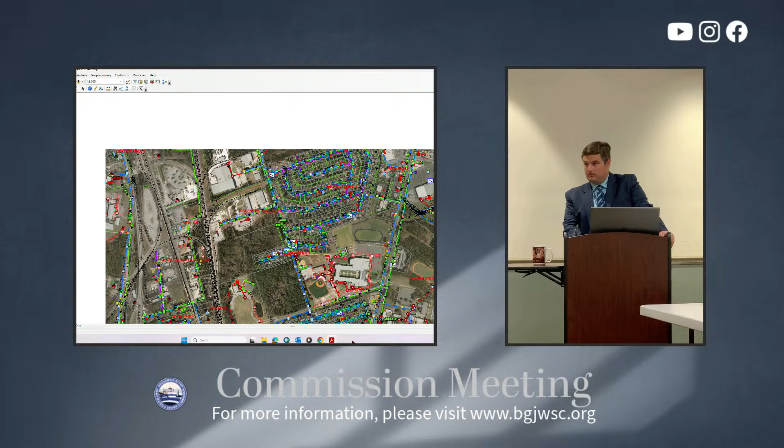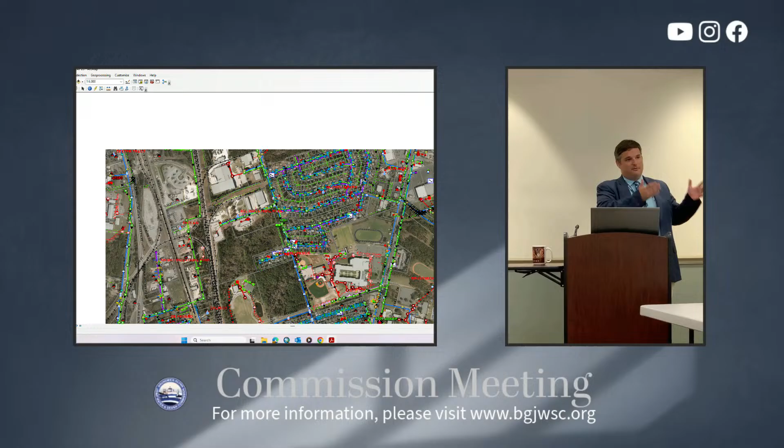The property corner is. Does the property adjoin it, where the sewer line is? Well, I think it's right-of-way, but yes, sir. I don't understand yet. Is the sewer on the property? There's sewer at the property line. The lot is very large because it's an industrial facility. They're bringing in a portable trailer with one bathroom in it. They don't want to have to put in a grinder station to run 1,100 feet from the trailer site to the. Does Reeves Young own the property?

Reeves, not Reeves Young, different company. Does Reeves own the property? The property is owned by Martin Marietta. We're on a ground lease with the property to operate an asphalt plant. So you're operating an asphalt plant on that property? Correct. We have a 6-inch well, and we do have a septic tank on that site. It was done in 2007.

Andrew, you just said it's at the property line, so 500 feet requirement, but you just said they'd have to run 1,100 feet. From where they're locating the trailer on the property. Why is the trailer being located there? It's coming off scales from the asphalt plant. It's located there so they can take the samples off the trucks.

This is a portable lab, it's on wheels. Right now we finish Camden and go into McIntosh. It'll probably be there at least to the end of the year, maybe a month later. It will basically be mothballed after those two projects are done, unless one of the other Reeves facilities needs it.

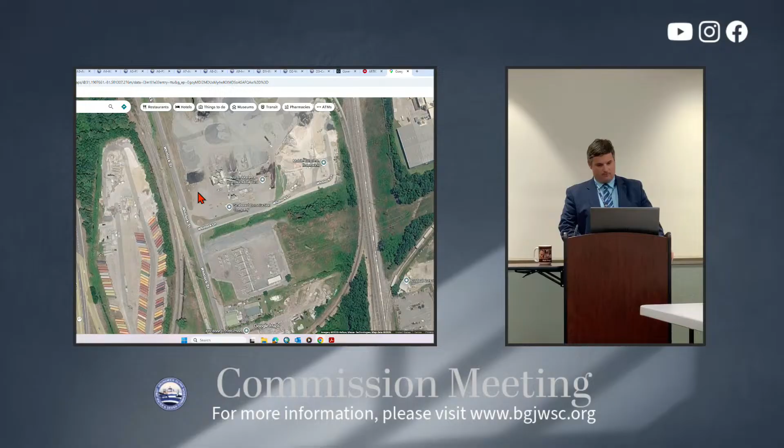And are you going to have to put down a septic tank? No, sir. We're planning on just a tank, and have a waste management company come in, just like an office trailer, and pump out the tank as needed.

So the facility, finally got this working, my apologies. The trailer's going to be put in this general area here. There's a sewer line at the back of the property here that they would be connected to. But because of the location of the trailer and the point of connection, this is obviously a very large lot to have that asphalt facility on.

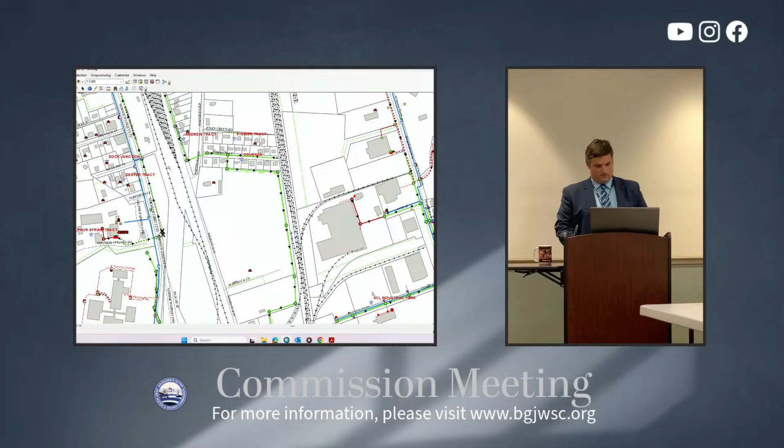And from where they're going to locate it to where the sewer line is, you say it's about 1,100 feet. According to Robert Sill, I haven't measured it myself, but he's pretty good at measuring. It's pretty close to 1,100 feet — 1,107 feet of 2-inch force main. I don't have an issue with it.

Mr. Chairman, I move that the Facilities Committee recommend approving a variance request for parcel 03-08946, requiring the parcel to connect to the public sewer system. Is there a second? Second. Any questions?

I'll say, we get a handful of these throughout the year for residential, and there's a feasibility study we look at, and I'm able to grant those. This one's only coming to you because it's not single-family residential, and the wording in the ordinance clearly states single-family residential units. Is that a notation we need to have the ordinance amended for? Do we get this request often? Typically if somebody's putting in a commercial business... this is a very unique situation.

Well, that's one of the things I'm pushing for, is when you find these things. This is the first one I've had in 8 years. It was one like the Monday building — the contractor that built that took one there with a pump, and it was there for a year, and then it was gone.

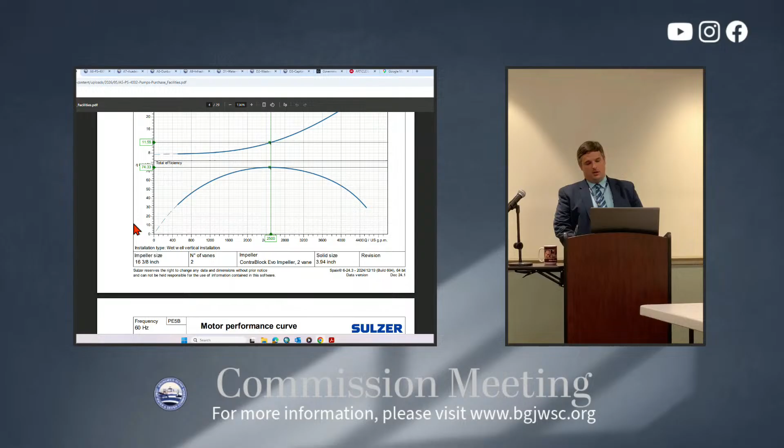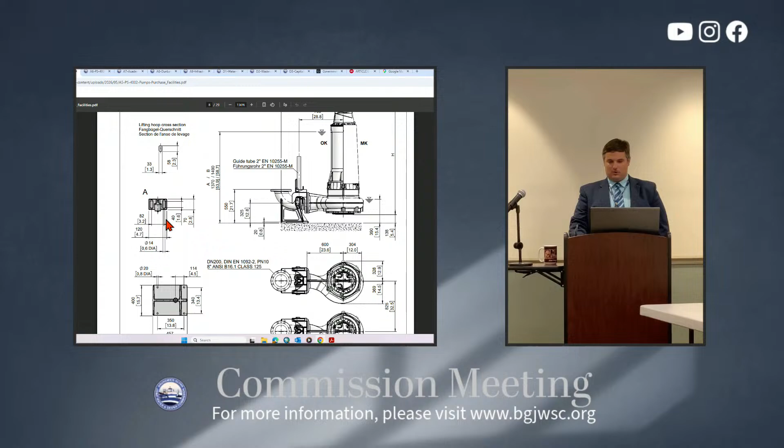We do have the associated packets with each of these pumps. We have each of these types of pumps in our system running successfully. They are currently KSB pumps, but these are in-kind replacements. What is the gallon per minute, 2,500 on the replacements as well? Yes, sir. So we're not upsizing the station, this is a replacement of worn assets, and we don't need any upsizing. We don't need any more down there right now.

The flow theoretically should be going down with that lining project we just did. Are all three pumps the same horsepower? They're in the same area, but not exactly the same. We have 100 horsepower VFDs, so as long as they were under 100 horsepower we considered them. 84 horsepower for the Sulzer, I think it's 87 for the KSBs, and the Flygts are 88s, I think—85s on the Flygts. So everybody's got their own individual motor horsepower, they can be different. So technically this one uses a little bit less power too—very, very little bit less power. Okay, anybody got any questions?

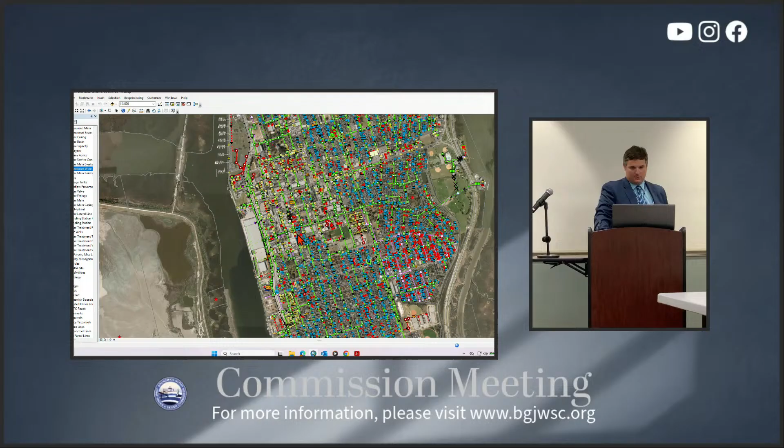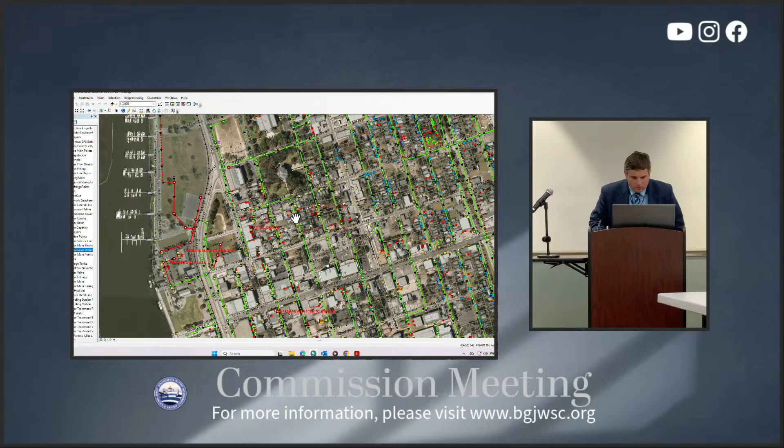Andrew, I'd like for us to look, and I can get with David, to talk about the hydraulics. This pump station pumps into a common force main at 4002, can you pull that up? Yes, sir. It pumps to a common force main—now the force main for 4002 is a long way before it manifolds in, but it does pump to a common force main. Let's turn it all the way around. 4002 is right here in downtown, this pump station right here. It goes to the force main—where is the force main? 4003 was redone about 8 years ago, there it is. You can't really see it, but the force main is right here alongside this gravity main. What size force main is that? An 18-inch force main, I believe—Todd, is that correct? Yeah, we had that one pigged a few years ago—16-inch force main. We did the smart ball testing on it.

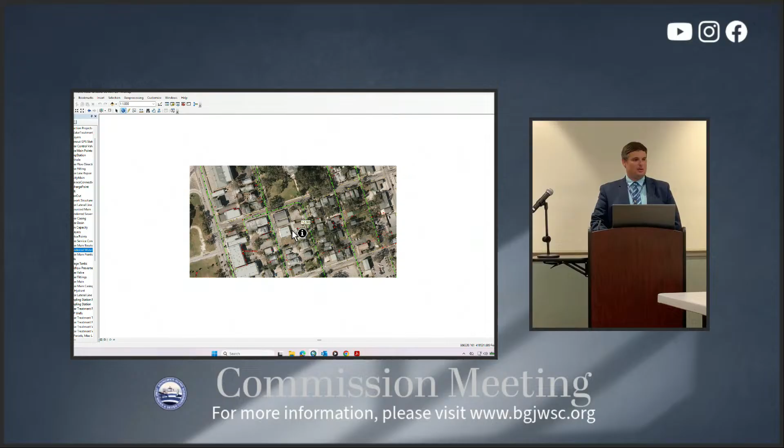We did the smart ball testing and identified a couple of areas where we needed to replace some ARVs, but found an ARV we weren't aware of in the system.

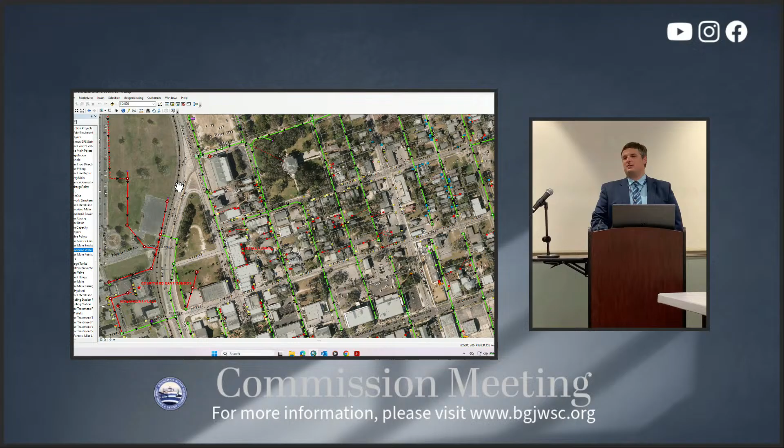Functioning ARVs really help a piping system. It comes down, ties in, 4003 is on K Street, turns on K Street, and then 4003 ties in at this point at K Street in Newcastle. Chairman's point is we need to confirm that we're not causing a deadheading situation with the pumps pumping against one another, when they're pumping simultaneously to trigger a high flow, and it will not interfere with the city's roundabout project there.

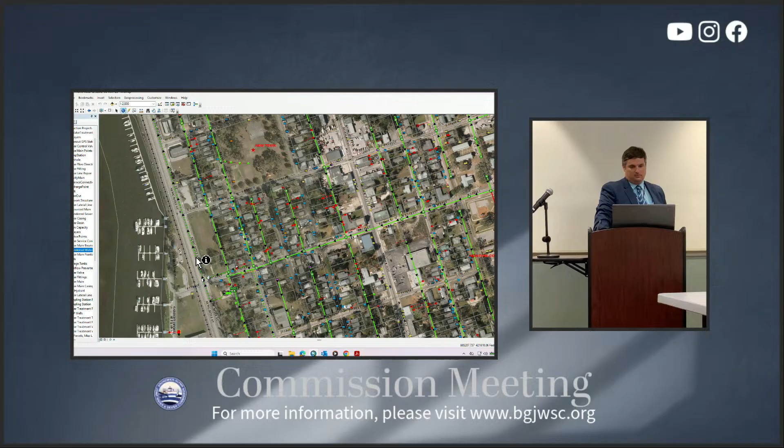It is an 18 after they tie in. After the tie in, have we ever considered tying into that manhole in front of that 4003 with a force main? Yes, sir, we'd have to double the size of 4003. But it can be done.

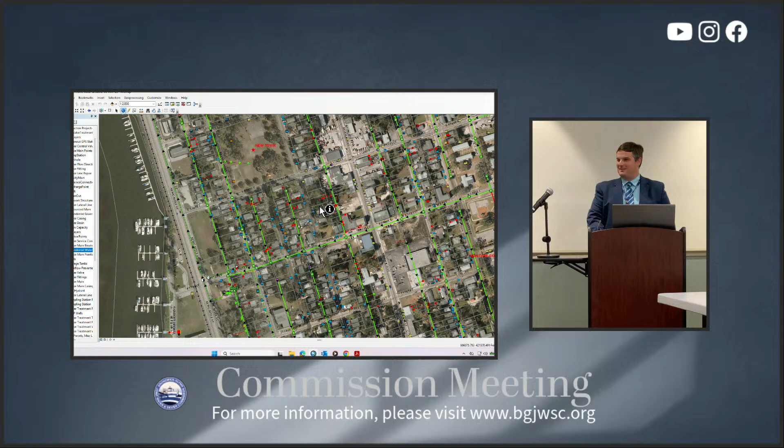Well, that's fine, we can go ahead if y'all wanna pass the motion, we can do that. It won't change too much. But I just wanna make sure that the pump is pumping on a good part of the curve when both are pumping, when both stations.

This is a like-kind replacement. We have not had issues where the pumps seem to be fighting each other, but we can go back and confirm the hydraulics. Well, they won't be fighting each other, the capacity for each pump is gonna be different. Understood, but the flow meters might not be at a very good part of the curve at the station, and it could be causing some cavitation in one of the pumps at one station or the other, which could affect the life of it. So we just need to check that.

Do we have a motion? With that, I'll move that the Facilities Committee recommend approving the purchase of pumps for Pump Station 4002 from Hydro Services, Inc. in the amount of $125,968.90. Second. Motion and second. Any other questions? All in favor? Motion carries 3-0.

Next item is a pump installation contract, once these pumps get here, to install these pumps in the station. This is 4002, those are large pumps, and it's a dry pit station, and we have to rebuild new support stands for the pumps, because the existing pumps had specialty stands made, so we have to get new support stands created.

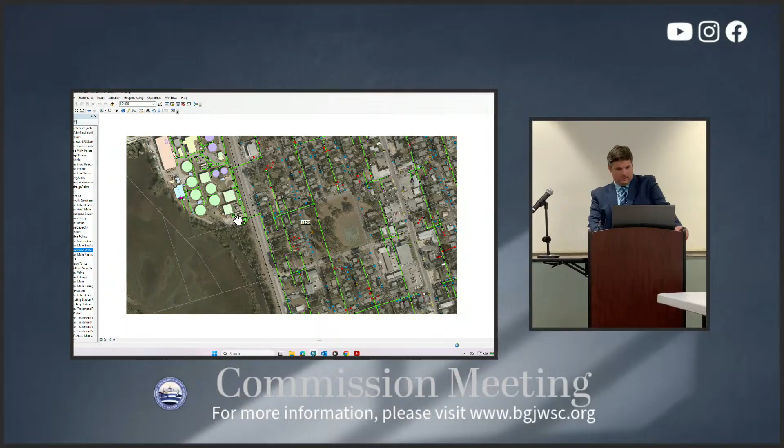Yes sir, the existing headworks at Academy Creek has a wash press system for the bar screens, and then there's a grit system that augers out through a grit classifier, and into roll-off bins for transport to the landfill. Currently, with the way the setup is, it's very challenging to actually get a roll-off bin to work for both simultaneously, so we end up with grit that ends up spilling onto the ground.

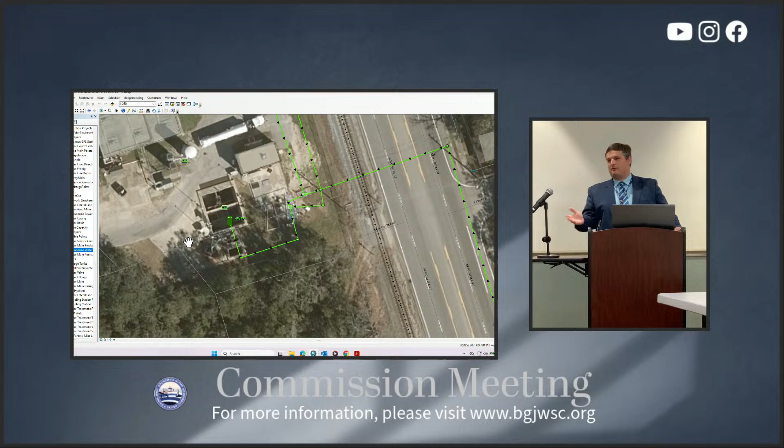We have to scoop it up with shovels and put it in there. So what we're requesting here is to modify the existing grit auger and turn it 90 degrees so we can bring it back to a second roll-off container into that, and therefore it keeps a lot lower maintenance scenario. So it replaces the existing discharge auger assembly with a new one that's rotated away from the existing bar screen discharge.

We got 2 quotes for fabrication of this from K-Machine and Diversified. Low cost was K-Machine at $38,530.

You got a picture of that? I do not. Well, we've been working with it like that for a long time, right? It did get worse when we changed the bar screens out. So we've been working with it for about 8 years then. About 5 years, yes sir. We've got to replace the auger either way because it's worn and it's starting to fall backwards and clump up.

The auger for the grit chamber after the classifier would have to be replaced either way, so we're just replacing that and reorienting it. The grit chamber's working now - one side is working, the other side has lost prime, but we're getting it back on. What we're gonna do is put timers in. It seems like when both pumps try to run simultaneously, it loses prime, so we're gonna put timers so that they don't run at the same time.

Instead of keep modifying this, would it be better off to put a new grit chamber in? New grit equipment? I'm sure we would, sir, but there's only so much money in the budget. And it's gonna be worth this cost? Yes sir, like I said, we gotta replace the auger either way, so there's a very minor adder to actually rotate it 90 degrees.

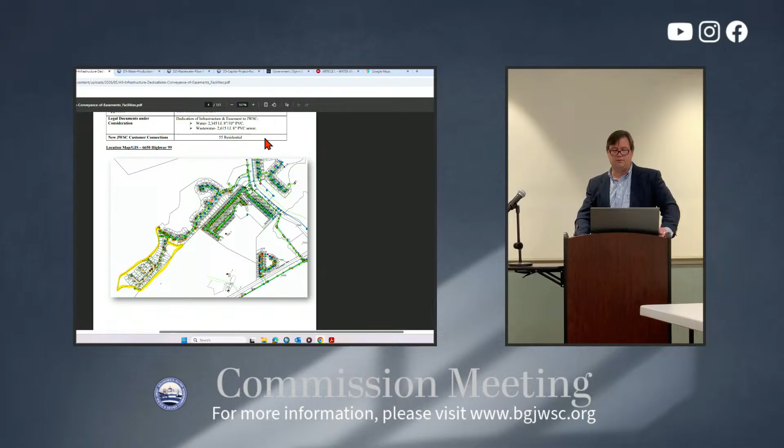Number 4 here is Hill Point Warehouse Phase 1. This is just the final wrap up. You've seen some items we brought before you previously from Hill Point, and one was an easement. This just wraps up the final little easement here that actually just encompasses their backflow preventer and their meter out front on the State Route 99 right of way. Is that by our tank? Correct, sir.

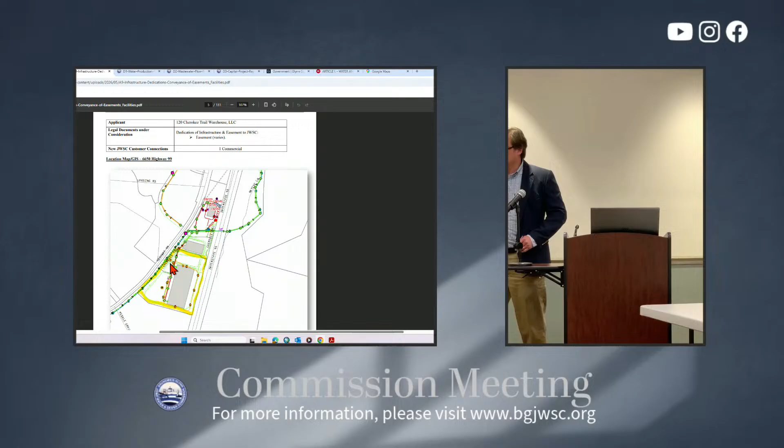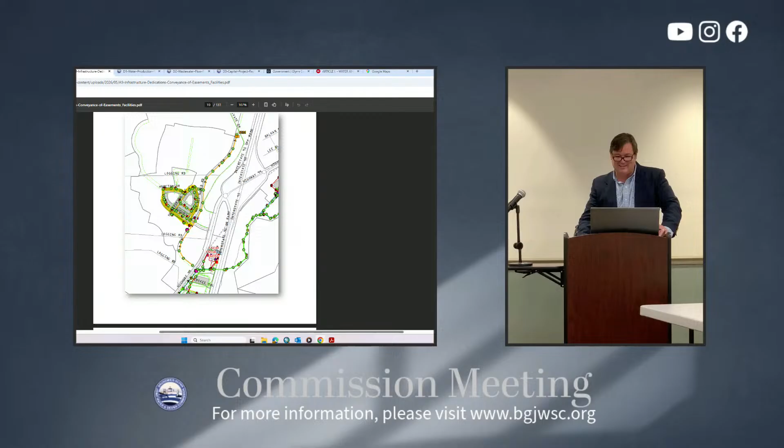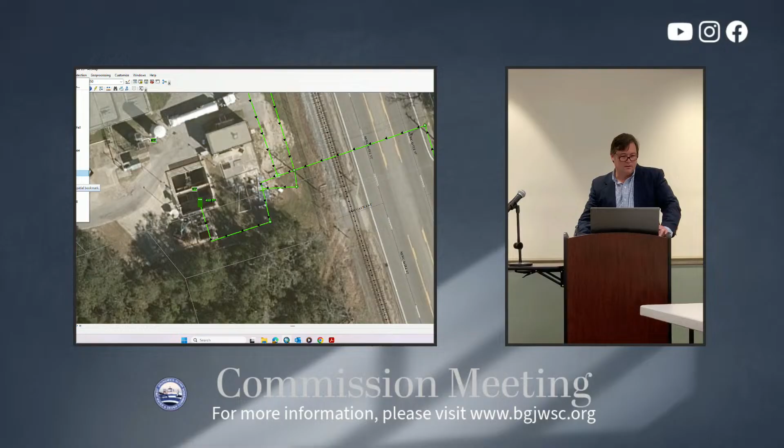Chairman, our tank is right here, this side right here. So this is the Hill Point development, phase 1, phase 2. This is Amazon, our tank is right here. So what are we talking about, all of this stuff? It's actually just, let me zoom in. This package is quite hefty, there are a lot of supporting documents, so it may take a second to get to it. What may be faster is if I just go to GIS and show you via that. Which is all the things in red, is that right? On our report, it's everything in red that we're talking about.

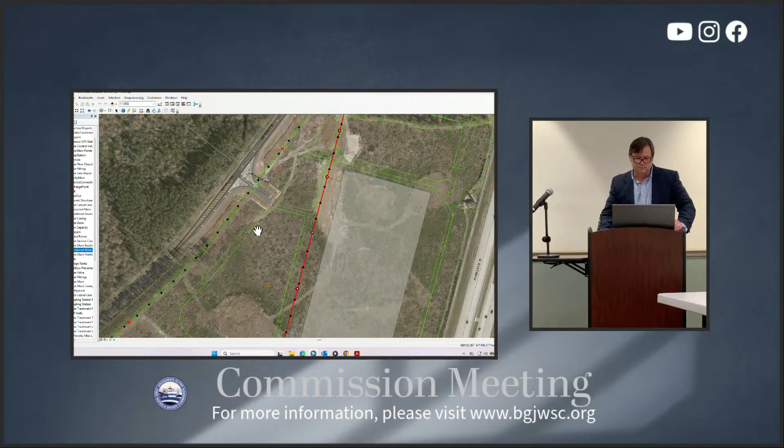Or green too, not green. Right, so it's just their little meter assembly that's out. We'll go to the right here, where the meter is, just right out here. It's a little box that kind of comes off. The highlighted area is the whole phase 1 development, but it's just a little meter.

The red stays red on site. Yeah, right, so red stays, that's private. That's private. And what's the yellow? The stuff that's highlighted in yellow. That's the whole parcel. Okay.

Yeah, that's just delineating the phase 1. And the green's existing. Correct. Green is our existing wastewater collection system. Anything you see. Okay, so it's just a meter box or something like that. Right, it's where the arrow is, approximately there. It's right, the backflow. Okay, it's their point of connection to the control water system. We need to do a little bump out from the right of way there to maintain access to the meter vault.

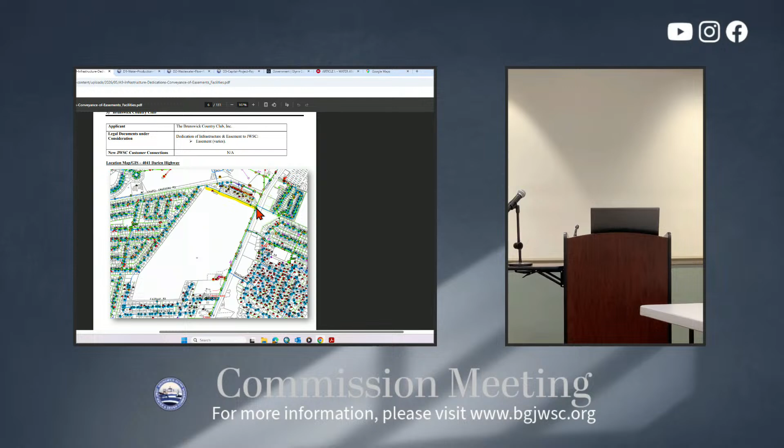All right, the fifth one here is with Brunswick Country Club. Now, this was an easement that we acquired over an existing water main, for some reason or another, over time, or back when the water main was installed, we did not obtain an easement where that is. Our friends here and customers from the country club desired a meter to be installed here to service their maintenance facility. And rather than having those folks come out here and install a meter out here and run a pipe all the way in, our water main is already right here. So the only thing we lacked was an easement.

So we approached them, hey, can you guys help us out with an easement? And we'll set your water meter right there on the water main. And that's what we did. So we obtained essentially a 30-foot wide easement that sits over the top of the water main. Satisfies that easement necessity. Also gives them their water meter.

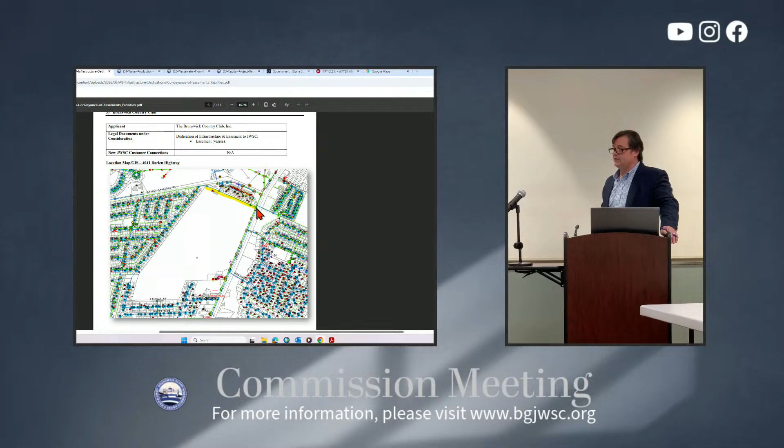I want to point out our legal folks actually, we did not have to do any kind of survey work with this. Between office staff, locating stuff in the field, and Mr. Dorman's legal team, we created the easement document to do this in-house.

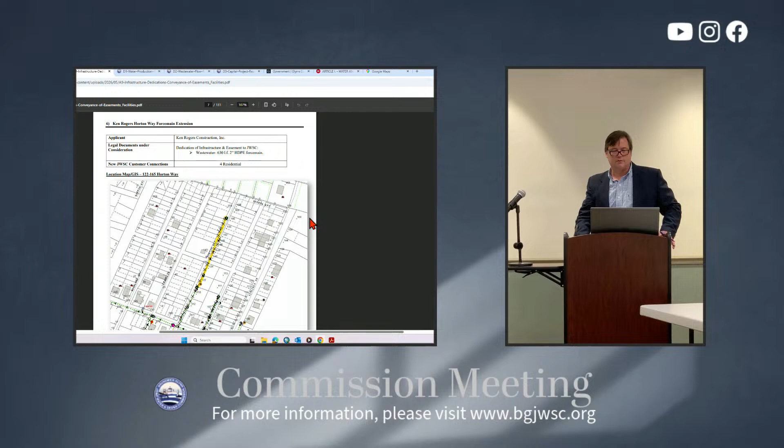Number 6 here, maybe Mr. Burrow's favorite on the list here. Mr. Ken Rogers, a developer in German Village, developed some lots, or improved some lots. They're on Horton Way. We're gonna say something about it. And for him to do that, do what he needed to do, he needed to extend a little bit of existing force main out there to get at those new homes on. And that's exactly what he did as part of, if somebody needs to extend the public infrastructure for their needs, and it's within the right of way, typically that's gonna be deemed as public when it's complete.

And then conveyed, and that's why we're bringing that to the commission for consideration. Certainly, it's advantageous for us to acquire that and deem it as public because we have other customers along the way that can now tie into that, utilize that.

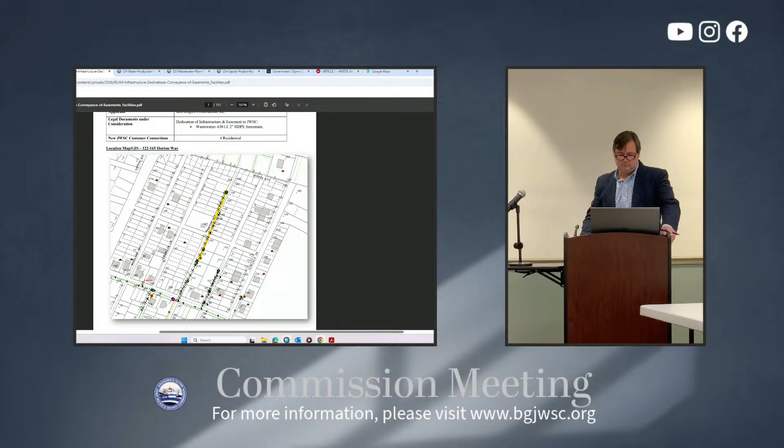And the current survey work that's being done at German Village, defining from Virginia Drive back to past here with the dispute in the property lines, this still stays aligned? Y'all been involved in any of that?

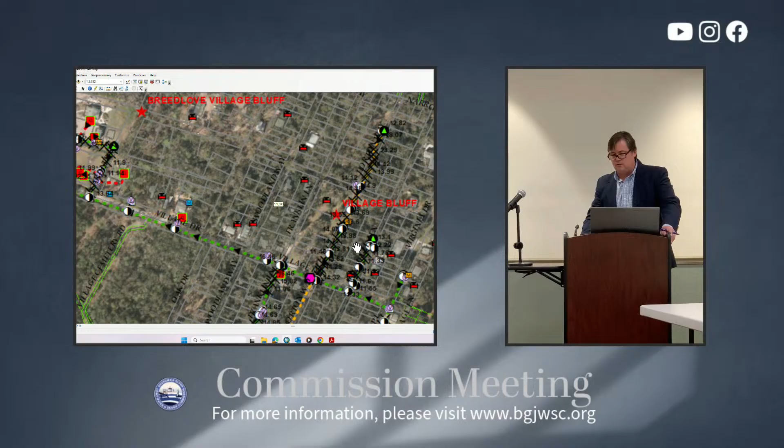Commissioner, so as far as we understand, we go exactly off the records that are presented in the tax digest and in the county GIS, so hopefully any corrections are reflected in there. It's still in the process of being corrected. Is it? Yeah. And, but it's moving, so I think it'll stay in alignment.

It's moving from Virginia northward. Some survey at some point in time started at the north end and came southward, and it displaced right of ways. So this looks like it would be in keeping with the least amount of disruption that's gonna be caused, so.

Good information, thank you for sharing that. Certainly, if for some reason the right of way did shift and move, and we found that, gonna be a lot bigger problem. We would definitely look with the county staff on somehow ensuring easements and whatnot would be settled over our infrastructure. Make sure we still do that. Especially if existing folks are tying to it.

All right, so that is a biggie for us. Finally closed that one.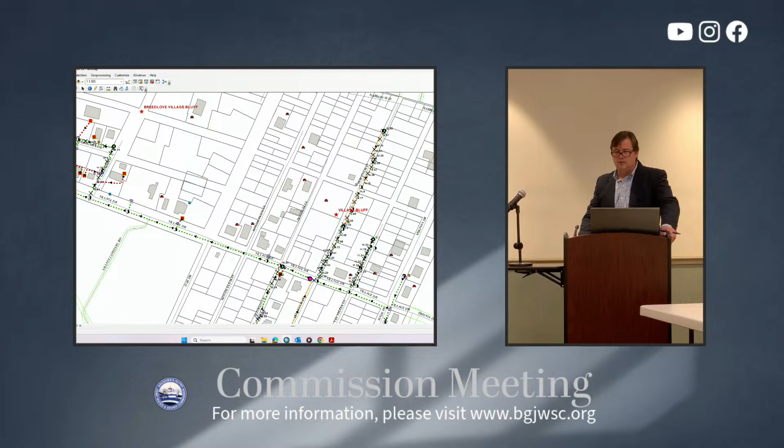Number 7, and the final one, is the Glynn County Demere Road right-of-way acquisition. So Glynn County is currently designing St. Simons Island Gateway roadway and drainage infrastructure improvements. This is another part of the project also extends up Demere Road, and there's some areas that Glynn County desires to, for needs, to acquire a little bit extra right-of-way to make that happen.

The commission does have the Demere Road elevated storage tank on Demere Road, kind of near the Ace Hardware or plant store up there, right next to the car wash. So this is just to need a little bit of right of way to Glynn County for that purpose.

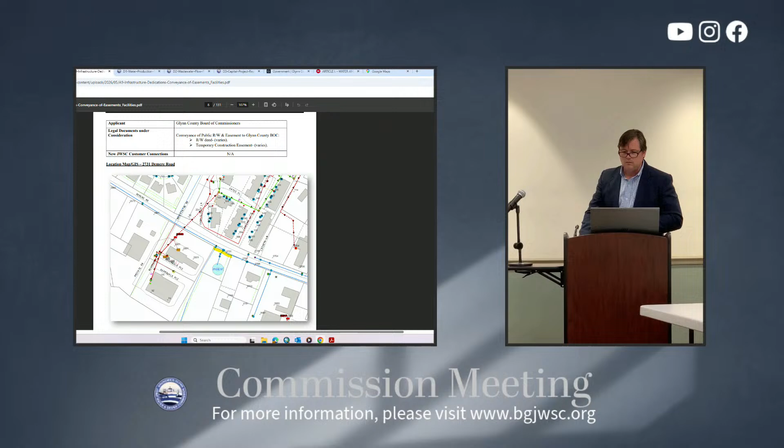How much right of way, how wide? So that one, I will check down here. Is it gonna impact our fence? It's- No, it will not impact our fence. If you recall, when you go out there, there's kind of a little turn-in road outside the fence, so it won't impact our fence.

There's some valves that will have to be raised to grade as part of the Glynn County project, because they're filling right there. They'll have to likely do some fill right there, yes, sir.

We'll still have access into there. Yes, sir, we definitely will, because we've got some future work at that tank, right? Yes, sir.

So here's... zoom out a little bit right here. Okay, Demere Road right-of-way, and 200s, let's see.

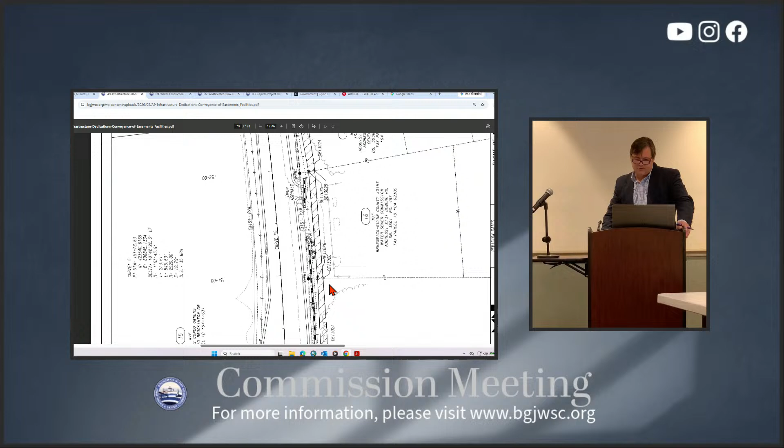What are they widening it for? Why do we need more? Making the turn radius better, a little bit of lane width. Okay, not adding another lane or anything. The total right-of-way area is 2/100ths of an acre, so it's not a whole lot, just a few feet right here, but it does give away.

So this is the tank site right here, they don't show the tank, but this is the fence for the tank site. Right here is the car wash, Ace Hardware, and garden center. And this little strip right here is the piece they're acquiring from all the parcels up and down the property.

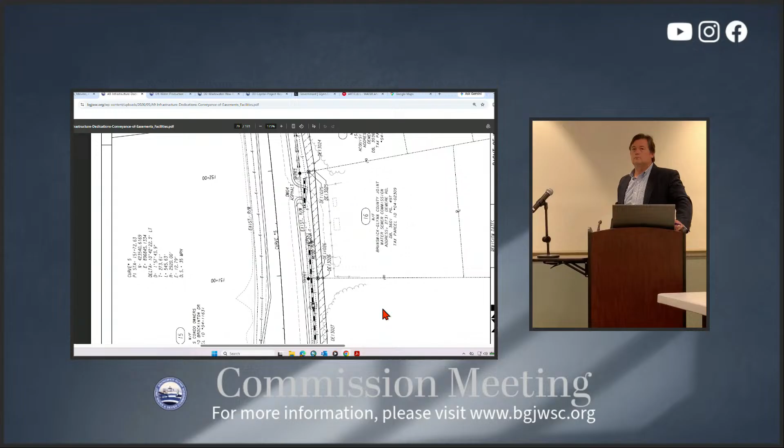Is that what I'm seeing? We don't get easements in the right-of-way. Yeah, they're giving an easement to Glynn County - a temporary construction easement while you're doing that, and then the permanent right-of-way.

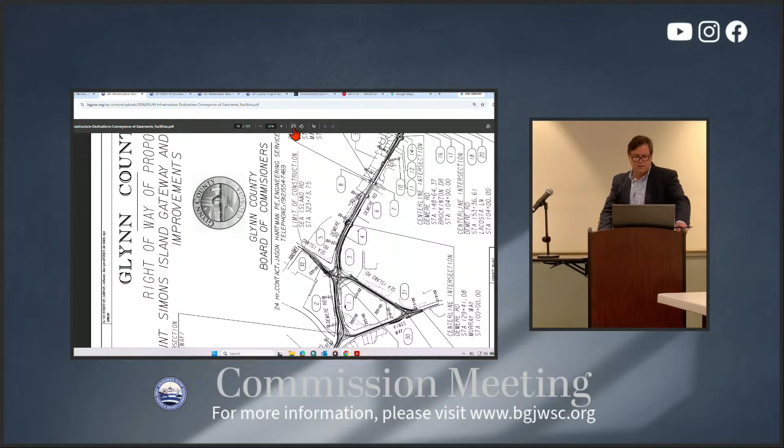So I can also share this right here, kind of the summation or the overall sheet. Kind of shows the improvements Commissioner Hill was describing, and that's some of what's proposed, and so we were up here in this area.

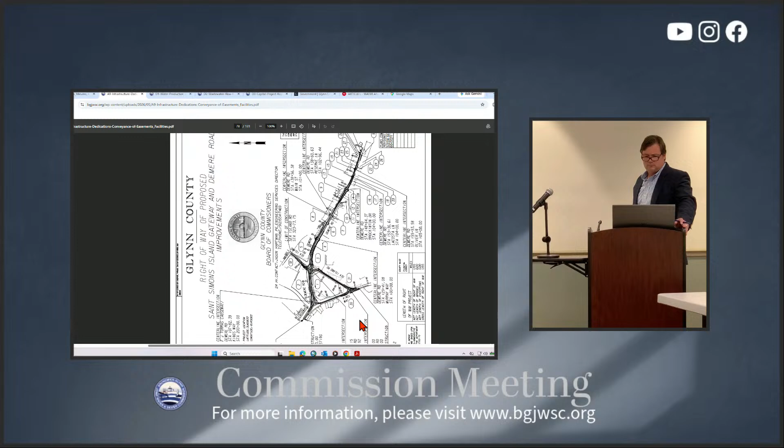Commissioner references we're also doing projects on the list - pump station 2023, force main improvements, replacement for that force main upgrade. We'll work with county staff very closely to make that happen, and include that as part of the Gateway project.

We met out there on site, as a matter of fact it was Tuesday, with Frederica Academy, because that's where it currently discharges. So we're working with folks out there to obtain a different easement to reroute that, even possibly around their campus.

Rectifying an issue there that we've been looking at addressing for a long time. As part of that, we're cooperating with Glynn County on a little bit of extra survey - staff offered to do that in-house for us - and extend the construction limits just a little bit to incorporate what we need for the force main.

All right, that is the last item. The last two in your packet, again, are not for consideration today.

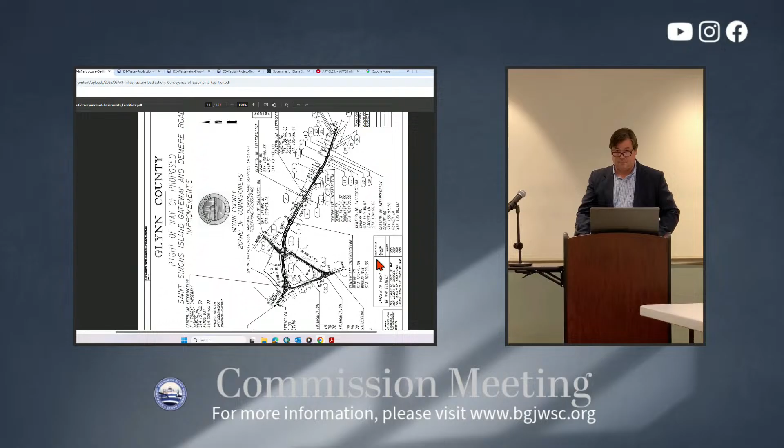Okay, so we go into the discussion section now then? We've got to vote on these. Can I have a motion? Mr. Chairman, I recommend the Facilities Committee recommend approving these 7 dedications. Does that cover it? That'll work. Second. All in favor? Motion carries 3-0.

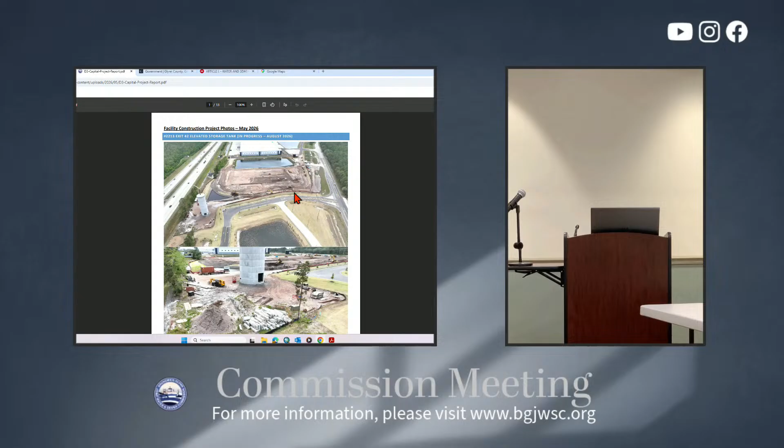So the metal tank is going - how's it going to fit on that, the next picture? Next page. Oh right, so - how's it going to fit? Right, where's it going to fit?

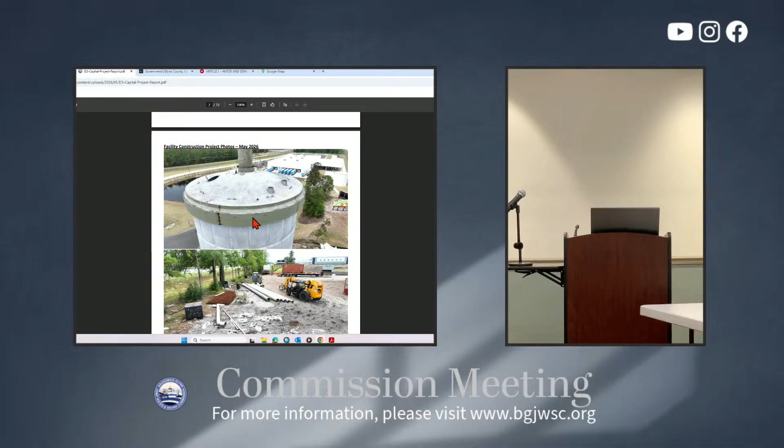So, as the bowl - we'll show some pictures next - is constructed down at the base, near the ground, and then as it is hoisted into place, the bottom ring of the bowl actually goes up and it'll be welded in with a weld bead all the way around, locked in place, and then it's grouted with concrete to fill this miter in here. And that'll lock the whole thing in place.

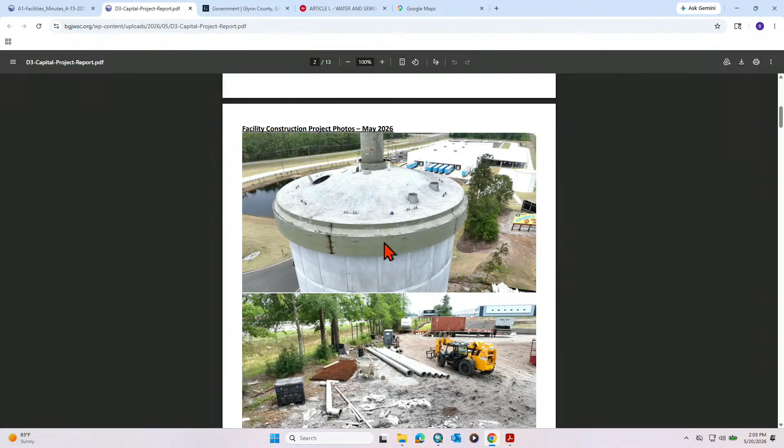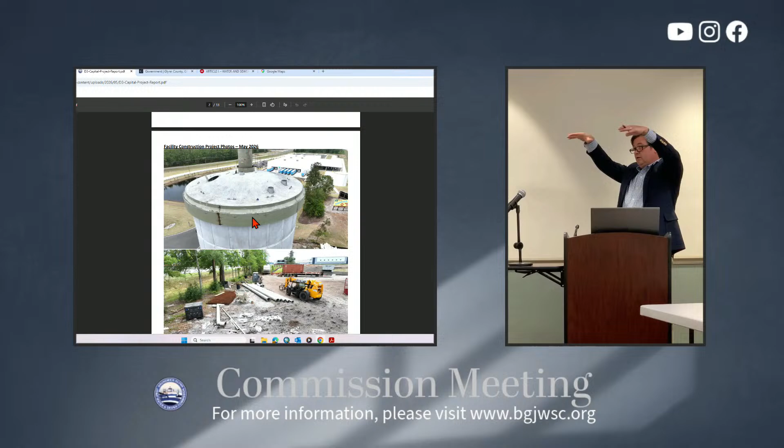Like the one on the south, it's been lifted up, but they've not completed all the grouting and everything. Correct, they're working on finishing all the welding, and then they'll grout that last miter and it'll lock it. Right now it somewhat looks like a wine glass, open on top. Eventually the top will be fabricated and welded, all the plates are there already. Once that's done, it'll be structurally complete.

They had the concrete buckets up on the top of the crane today as I was riding through. Which one was that? Exit 29. Commissioner, thank you for the report there, I've been looking at it every day driving back and forth to Jacksonville.

So we have our resident inspector driving up and down 95. We appreciate and respect those reports. Pretty flag they had attached to it too.

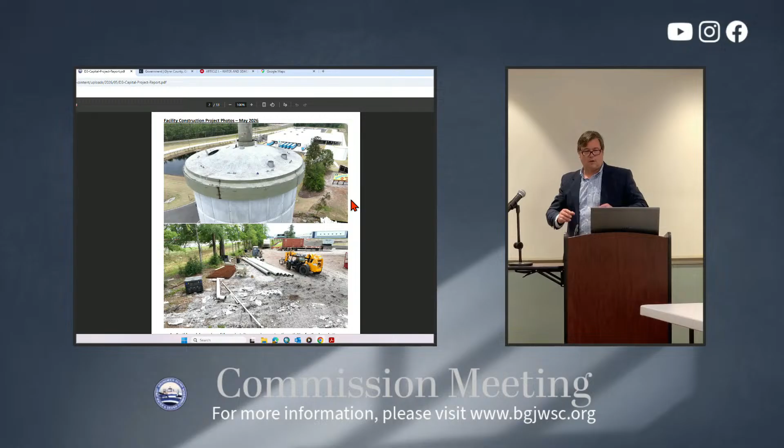Generally, what are we gonna be using that void for in the concrete, in the bottom? There's a door that we'll have, you can use that for storage in general. You can't store anything in those, underneath those tanks that have fuel in them, so you can't store equipment or things like that.

Like the I-95 tank that has this facility, we have some extra electrical equipment and things like that that get stored in there, because it does stay dry and surprisingly cool in there. So it just becomes a good storage area for items that are not needed all the time. And then we'll have two other options for this as well. Again, can't store anything that has fuel in it according to EPD regulations, but other than that, you're pretty wide open for what you can do.

And we have a concrete floor in there. Yes, correct. And they'll be tied into SCADA. Both tanks will be on SCADA, yes sir, so we'll know the level at all times.

Yes sir, right, you can see here, that looks a little small in the picture maybe, but that is a roll-up door, full-size roll-up door. You drive the vehicle in and out if you wanted. But it's not wide open inside here, we do have the piping, the vertical shaft and all that, and other stuff in there.

But anyway, the site's gonna actually get brought up too, so there's more dirt that's gonna come in once we're done with the tank construction. And so you're actually gonna be leveled off here.

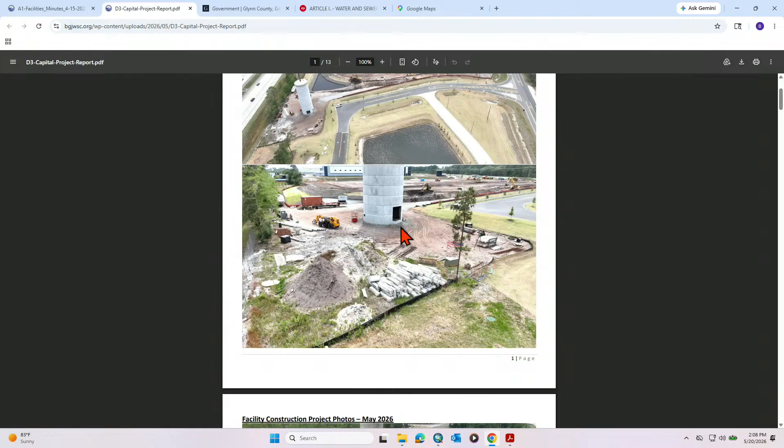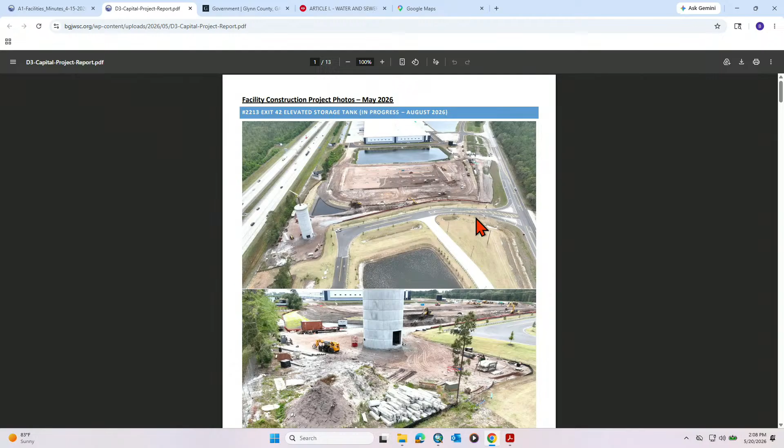It wouldn't be a bad place to put a cot during a hurricane. Let me ask you, there's two ponds I see there on the two adjacent properties. And both of those two properties have tanks, also ground storage tanks for fire protection. Fire protection, yes sir, that's correct.

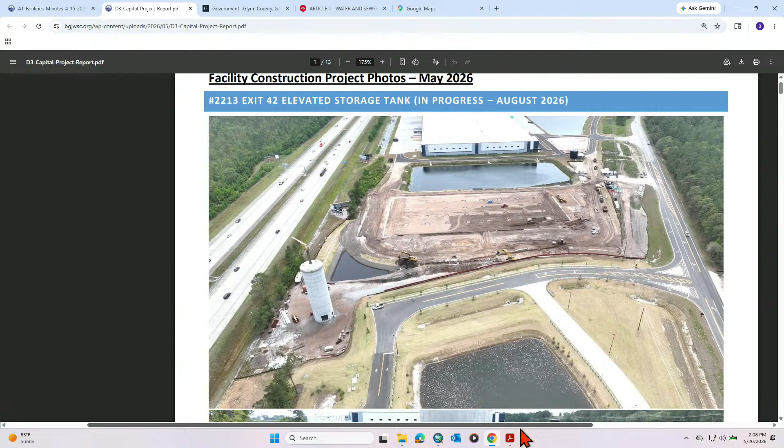What are the ponds for? Is that just for, what is it? Stormwater retention. Is it stormwater on those sites? Correct, stormwater retention, yes sir.

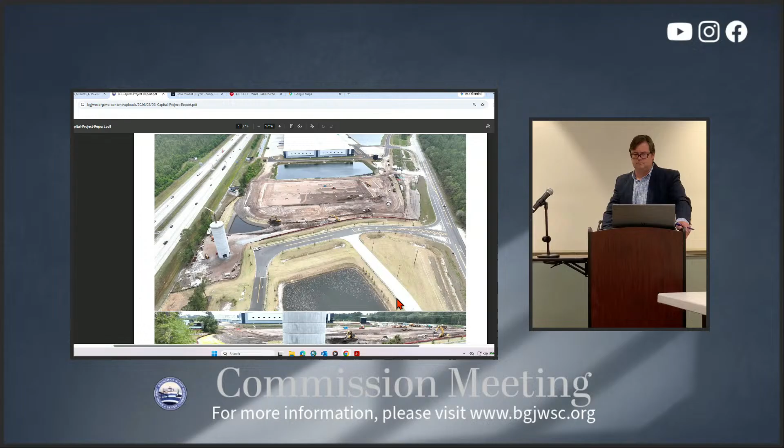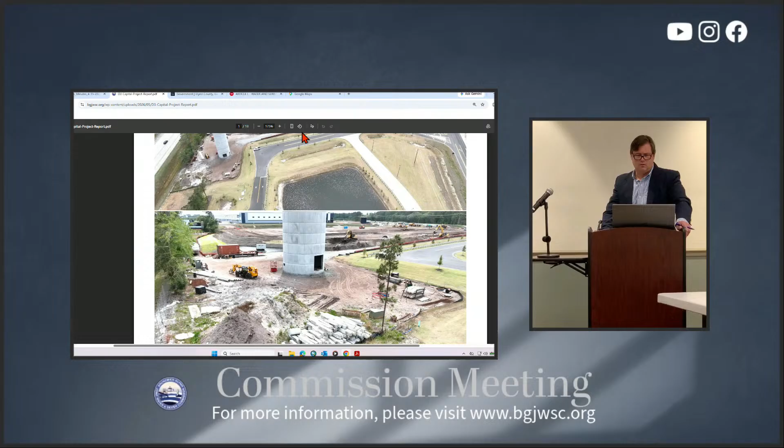Moving back down to Exit 29, this is our water production facility, phase one of our improvement project down there. A really good facility, getting close to the end on this one here. I imagine by early summer we're gonna be complete out there. Good shot of the well that was rehabbed, improved, ground storage tank behind it. Well discharge piping goes to ground storage tank in a production facility, and from there on out to our system.

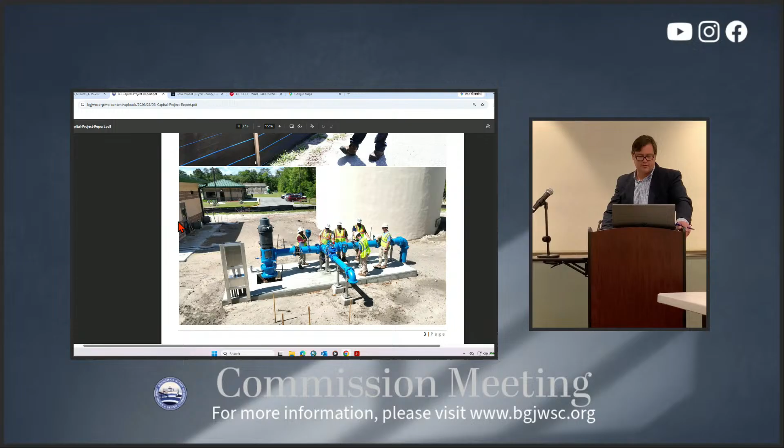And you can see the existing exit 29 plant in the background. Shot indicating here some of the challenges, existing, the gate actuator, et cetera. There was, at the beginning of the project, some rerouting of the horsepower feed and transformer locations. There was a little bit of work on the water line that's remaining.

When's this project supposed to be finished? Originally it's zeroed in on June. I would imagine there are some delay days that they're submitting for, for various things, looking toward project modifications and things along the way. A few weather delays, but not too many to drive it. I imagine probably by the end of July.

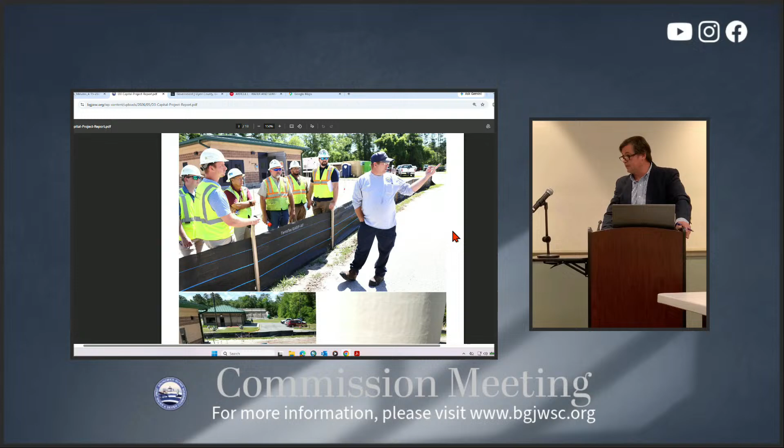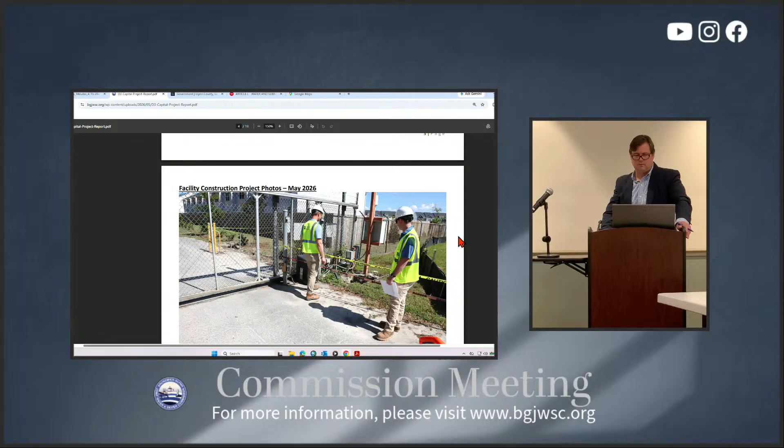Obviously some site cleanup work, whatnot. Grass needs it, good thing we got a well nearby for that grass. Good overview shot there. It's always a pleasure to see craftsmanship on display, and the electricians on this job have done a fantastic job.

No small job pulling all this heavy gauge wiring.

Commissioner Gill mentioned earlier about Exit 42, which is Division 2 of this project, the 500,000 gallon elevated water storage tank that we hoisted into place on Monday. There's a shot of it right there, about a week and a half before we hoisted it in place.

They're finishing up the logo in this shot with the cherry picker. Good shot of how the logo is painted. I'll call them artisans - it's still a lot of hand painting that happens with that. We use stencils to make sure the paint goes in the right places, but at the end of the day, it's still applied by hand.

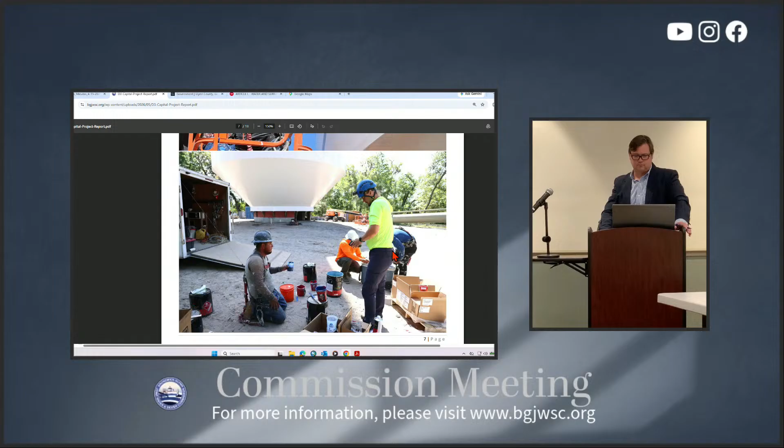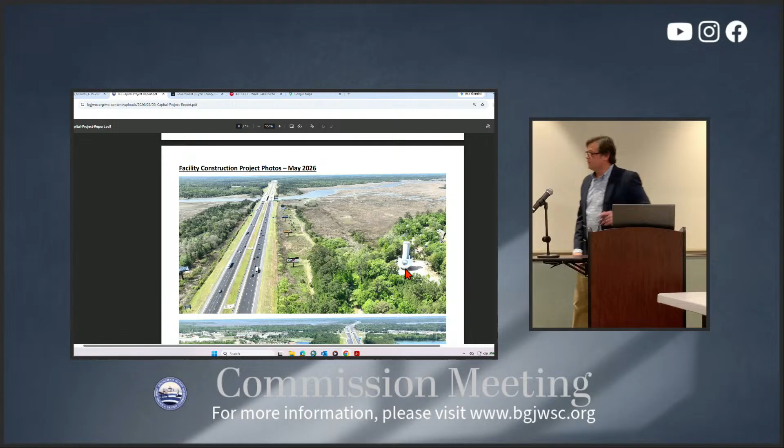The next picture shows how it was on the ground before they raised it. Yes, there it is. So you can see it over the top like we were talking about earlier. That's it, ready, waiting to go, be hoisted up. I think this is before they had their hydraulic rams and everything set up here, the cables dropped down, so it's about a week before that. It looked like they're toasting something.

There's another good aerial UAV photo from I-95, seeing it. You can even see it peeking through the trees, the bowl of it, when the logo and whatnot was laying while it was still on the ground before it was hoisted in place. It's very visible now.

Thank you again to Glynn County's staff and leaders for participation in our big milestone on Monday.

Did you give a speech? I'll let Mr. Tom there, the project manager, get the safety talk - we'll call that the speech. I think we were all making him nervous walking around the site, but he was accommodating.

So Division 3 of that project is the loops, a smaller component of the overall project but still important, to make sure this elevated tank is connected to the system as best as we can. There's a couple loops, the designated loops that we facilitate through there. That's wrapping up - a little bit of paving, I believe, and final inspection, and then that one will be done.

Work with the neighbors - I think the paving's been completed. Yeah, I think we're just waiting on final compaction, getting the county the final compaction.